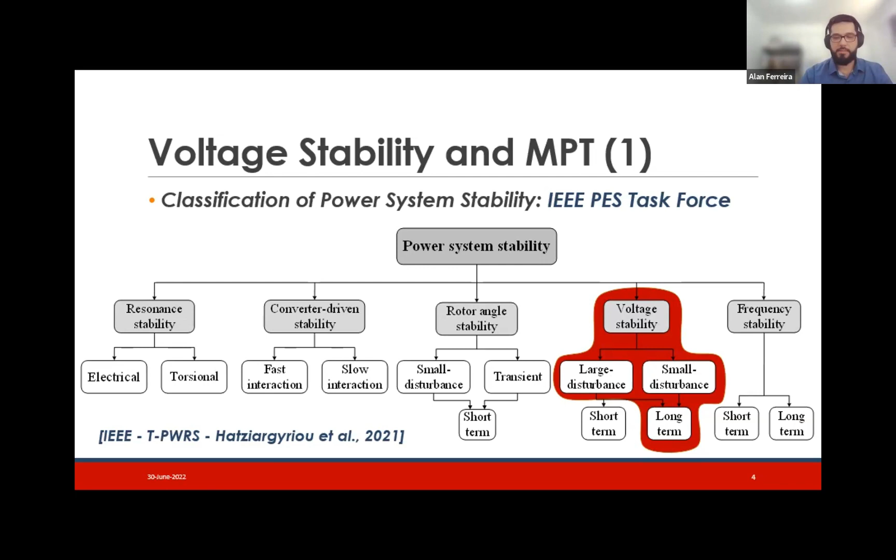To start, it's important to remind the relationship between voltage stability and maximum power transfer, because this concept will be very important when we think about monitoring voltage stability in power systems. We're going to be interested in assessing voltage stability in a long-term perspective, regardless if the disturbance is large or small. The analysis presented here may also be applicable for short-term voltage stability, but it was not the focus of this work.

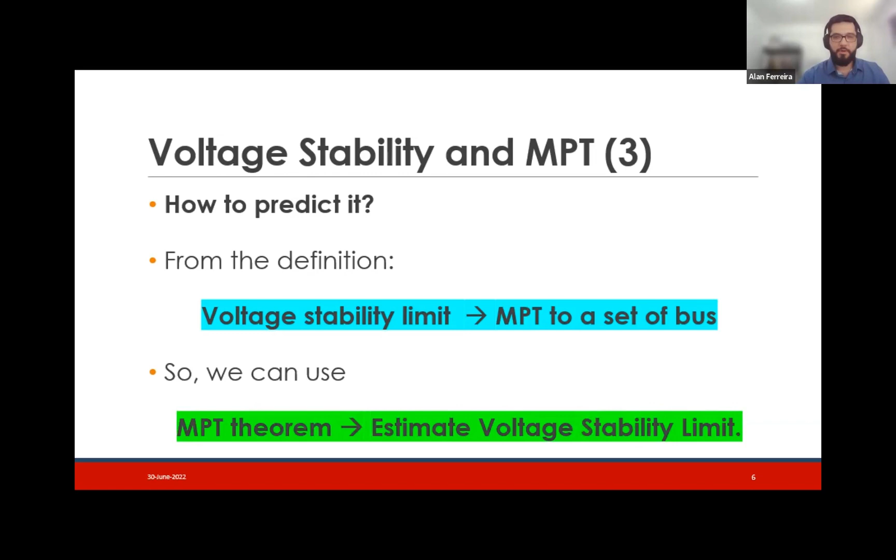Okay, but how to do that? How could it be possible to predict the voltage stability of a power system? Just from the definition you just saw, there is a high correlation between voltage stability and maximum power transfer to a set of buses in the power system. So because of that, we can use the maximum power transfer theorem to do that task and estimate the voltage stability of a power system of interest.

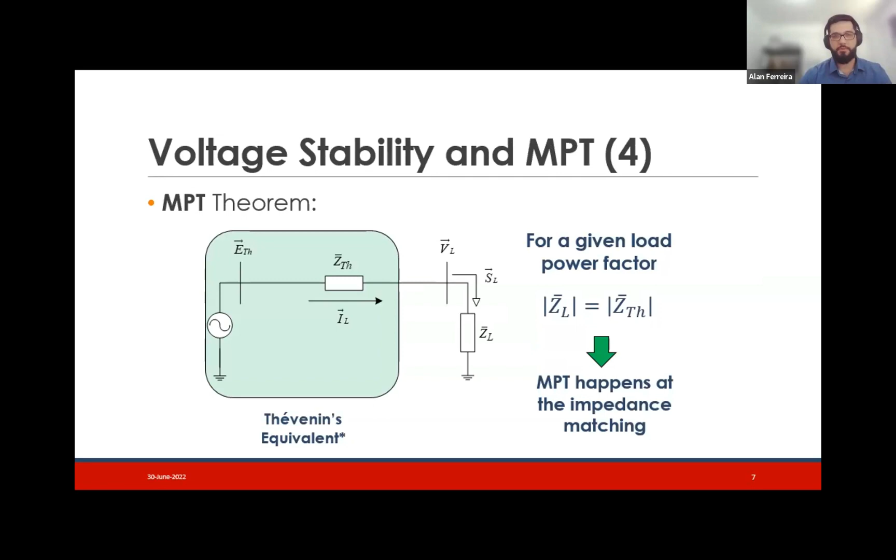Okay, and we can say that this theorem, the maximum power transfer theorem, will be the foundation for the Thevenin-based methods aiming to assess voltage stability, right? So the methods that we find in the literature share a basic operation mode, okay? First, they aim to estimate ZTH and ZL from PMU measurements, right? The idea then is to update this estimation as fast as possible in order to track any topology changes that may happen in the system, right?

And having both impedances, ZTH and ZL, through the impedance matching criteria, we can monitor the stability of a power system in terms of voltage, right? But as the impedances do not have a straight relationship with how much power we still have in the system, there are power margin indexes in the literature based on those Thevenin parameters, and using one of those strategies, we can then monitor the stability in a power system.

As well, since the monitoring of voltage stability is tightly dependent on the accuracy of the estimation method, if an approach inaccurately estimates those parameters, it may lead to wrong estimations of the voltage stability limit of a power system, right? And this can be one of the reasons some methods may not work properly. What is actually happening is that they are not properly estimating the equivalent impedance, right?

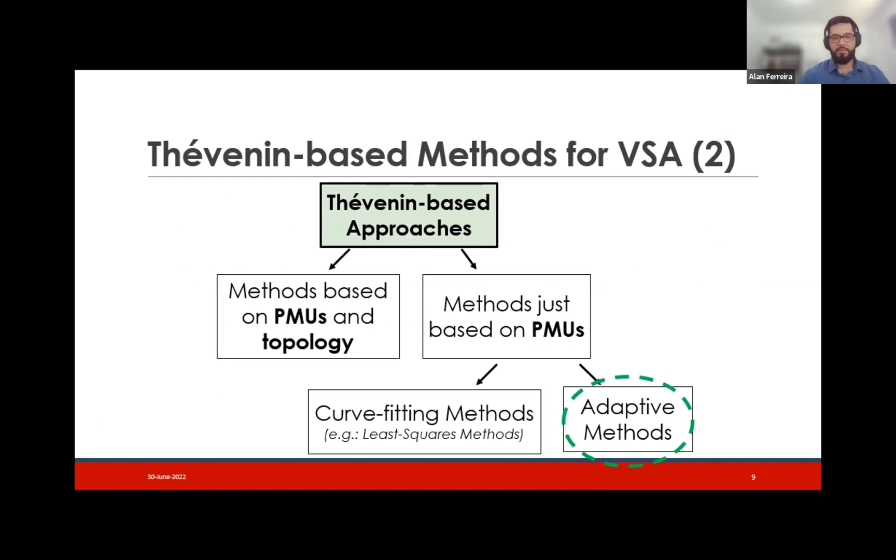Okay, so here we can organize the methods inspired by the Thevenin equivalent and PMU measurements in two big families: methods based on PMUs and topology knowledge, and methods just relying on PMUs. And to emphasize, the methods we are mainly evaluating in this work are the adaptive methods, right? Because of that, it is important to understand reasonably their operation mode, okay?

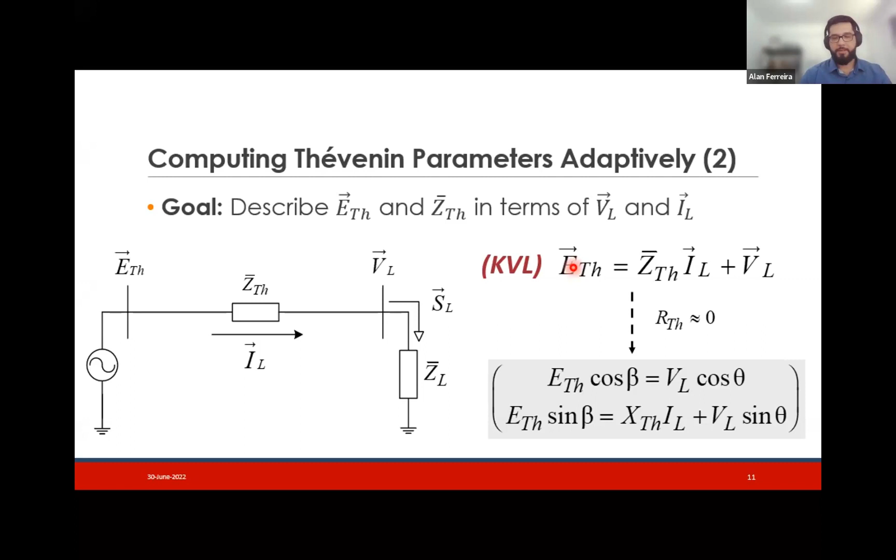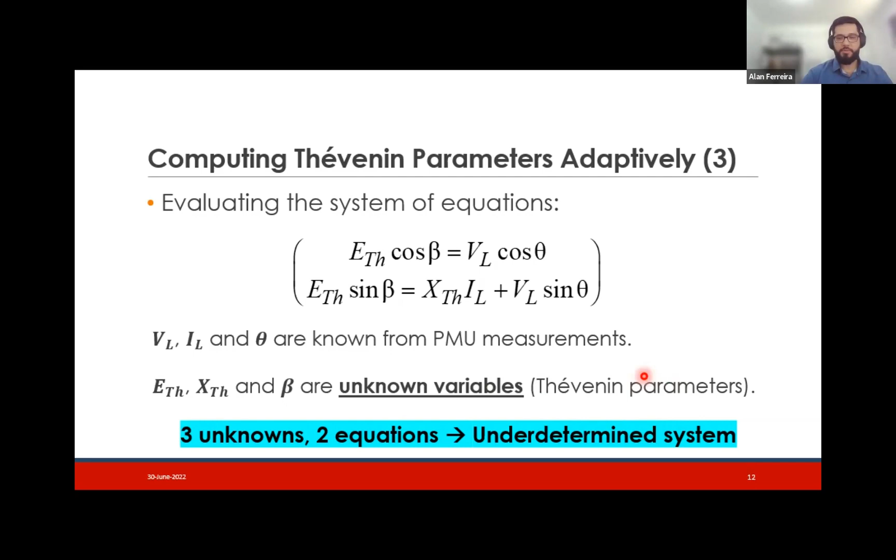In this system of equations, we have three unknowns, which basically are the Thevenin parameters that we want to estimate, and only two equations. Thus, we have an underdetermined system. But this problem became a solution, because from this issue the adaptive approaches arise. If we set one of the unknown variables, for example XTH, which we call the free variable, we are able to compute the other ones.

So to solve this system of equations, if we set XTH as the free variable, we can compute beta and ETH. Alternatively, we can also set ETH as the free variable, and then we have what we call the adaptive ETH approach. In this case, the quantities to be computed are beta and XTH.

And the issue is this: the free variable is the specified quantity. If it is possible to specify this free variable as the actual value, the other parameters are also going to be known.

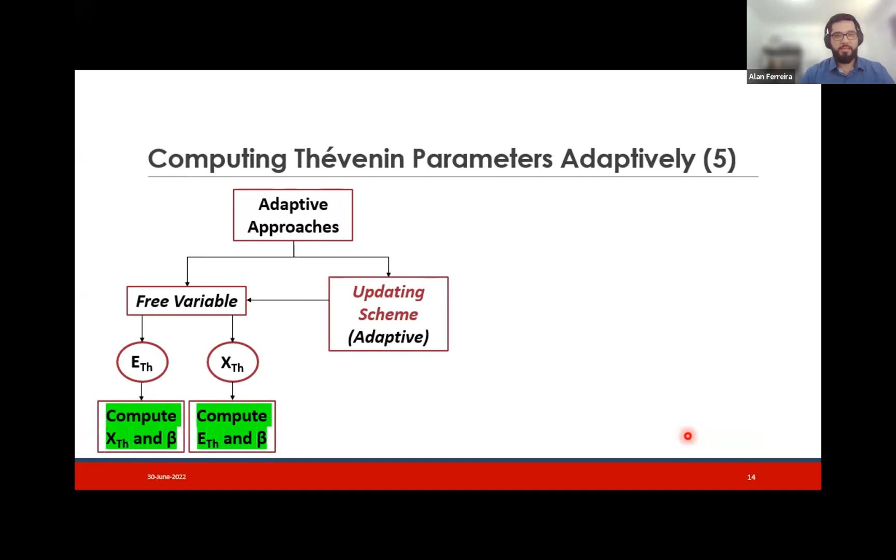From this, we can organize the adaptive approaches this way. First, we set one of the quantities, ETH or XTH, to be the free variable. But just setting this variable does not solve the problem, because we still do not know the actual value of the free variable. So the idea is to have an adaptive updating scheme to bring the free variable's initial guess towards its actual value, because in this way the other quantities will converge as well.

In our case, because we are using PMU measurements to drive the updates of the free variable, we give the adaptive concept to this approach. So when we talk about the adaptive approach, this concept is related to the use of PMU measurements to update the free variable for every time window of PMU measurements.

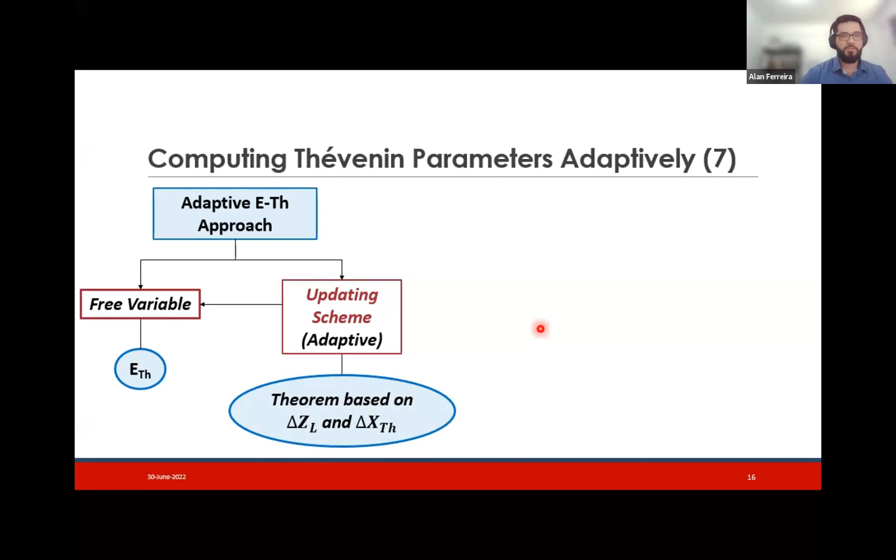The first time Thevenin parameters were estimated this way was in 2008 by Corsi and Taranto. On that occasion, the authors developed the adaptive ETH approach, setting ETH as the free variable and then computing beta and XTH. To drive the updating process, the authors developed a theorem based on the comparison of delta ZL and delta XTH for each two consecutive PMU measurements.

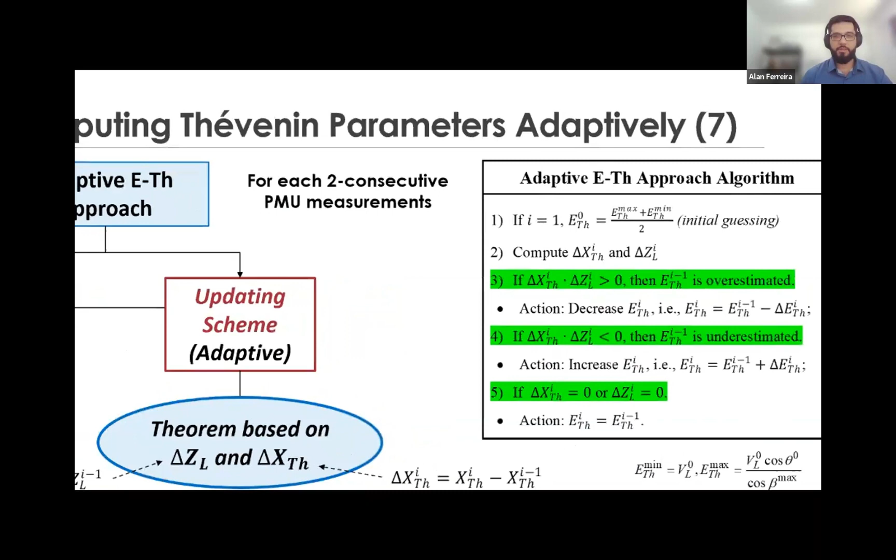So basically, for each two consecutive PMU measurements, they compute delta ZL, the variation of the load impedance, and delta XTH, the variation of the estimated Thevenin reactance. Based on those two quantities, they set their algorithm. Just to comment here, what is the rationale of this method?

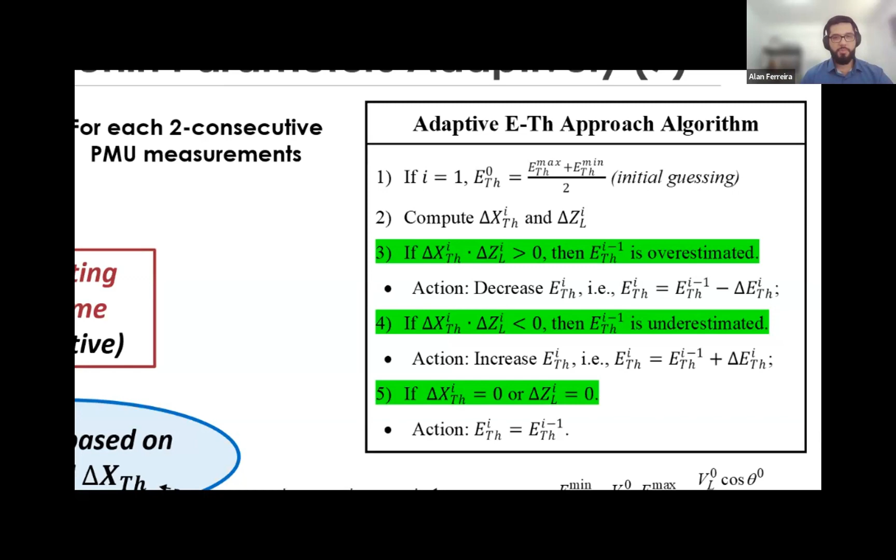Basically, if delta XTH and delta ZL vary in the same direction, it means the estimated ETH for that time window is overestimated, so the action to be taken is to decrease the estimated value. Conversely, if delta XTH and delta ZL vary in different directions, it means ETH is underestimated, and the action to be taken is to increase the estimated value.

However, if one of the variations is equal to 0, the method should not update. It is important to bring the physical meaning of these variations being equal to 0, because we're going to use one of them to develop the extended approach further. When delta ZL is equal to 0, it means the load of the system did not vary in that time window, so in this case we should not update.

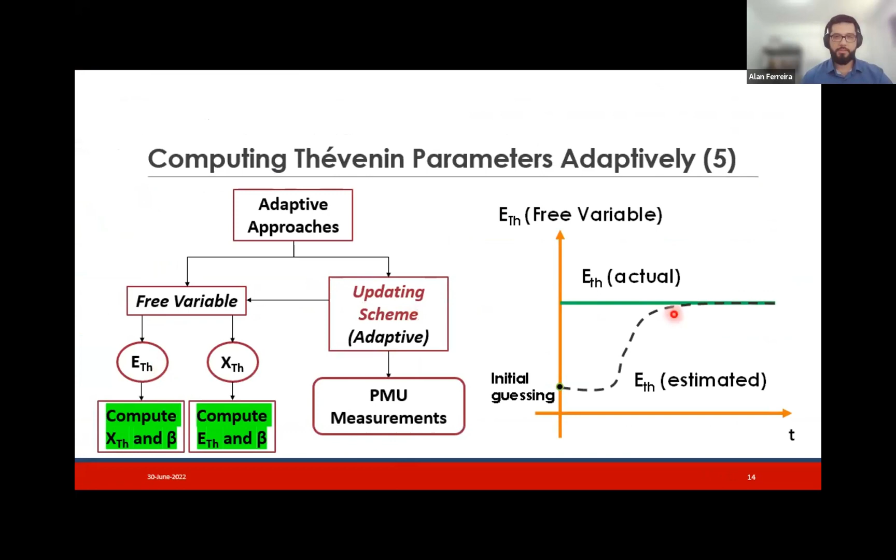So it's important to keep in mind those ideas. However, after a deep evaluation of the original ETH adaptive approach, we found out that the method in some cases may diverge the estimation. One of the problematic situations is when the power factor changes between the two considered measurements.

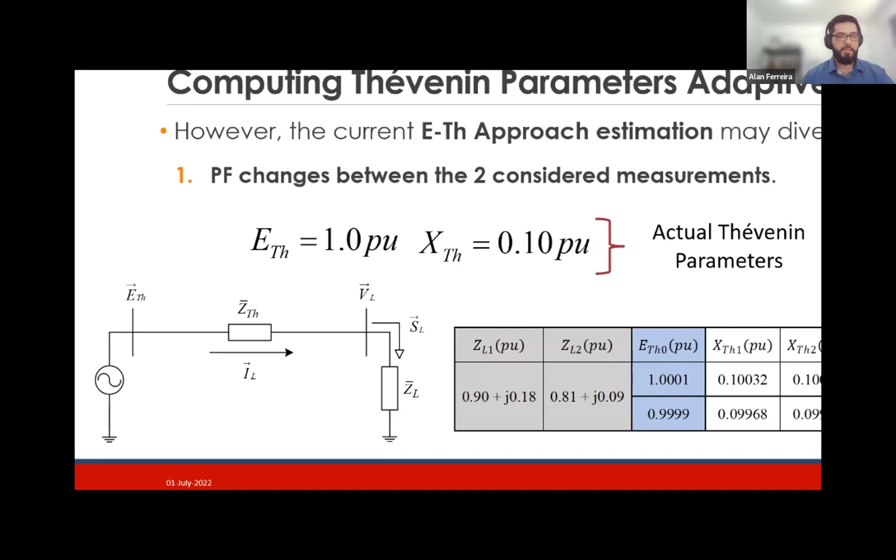So just to show an example of this, we have here this system, a load bus, and for this case, the actual Thevenin parameters are ETH 1 per unit, XTH 0.1 per unit. And what we're gonna do here is to subject this load to a variation. So here we have ZL1 and ZL2, which are the load impedances for two consecutive measurements.

And here we have analyzed two cases. The actual ETH is equal to 1 per unit, but here I'm guessing a value a little bit higher, that is, an overestimated value. When we compute delta XTH and delta ZL, the method should properly update. But what we see here is that we have overestimated ETH, and according to the algorithm, if delta XTH and delta ZL have variations in different directions, it should mean that the estimation is underestimated and not overestimated.

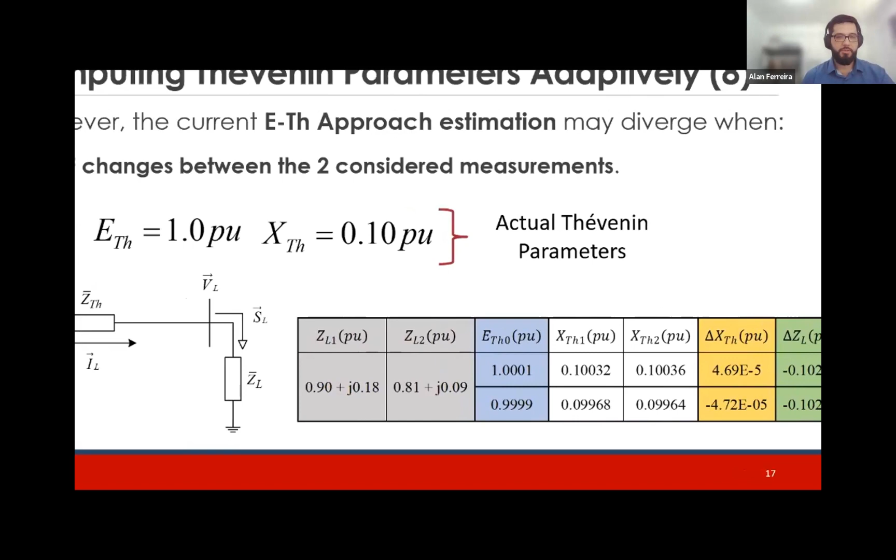So in this case, we are doing this variation with variation of power factor. And in those cases, we see that wrong updates are given to our estimated value. And if you have many time windows with wrong direction updates, the estimated Thevenin voltage would diverge, right? A similar case happened when we set an underestimated value here. The comparison of delta XTH and delta ZL did not provide correct updates.

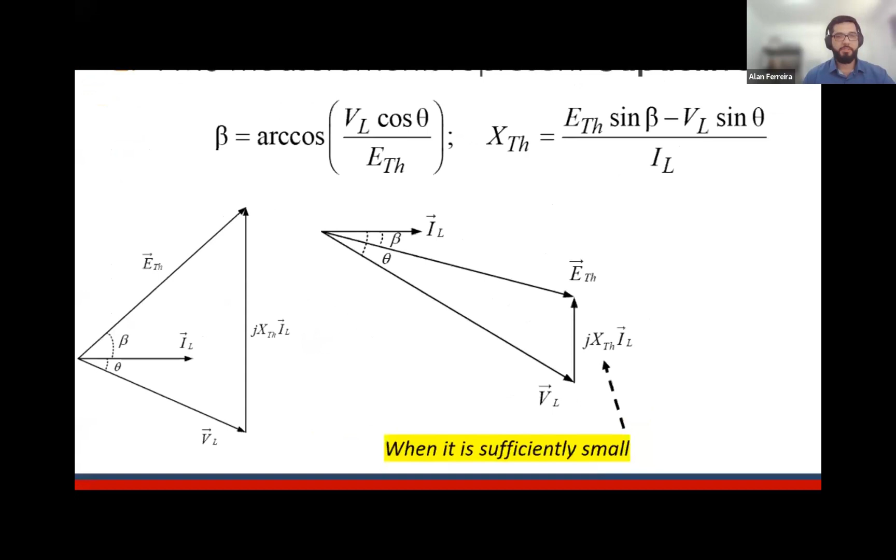The second case where the current approach fails is when we have capacitive loads, because we have checked that in some loading scenarios, ETH may lag the current phasor IL. So it means that beta should be negative. But the formulation that computes beta is an even function, right? So it's not possible to compute negative betas when the actual beta is negative.

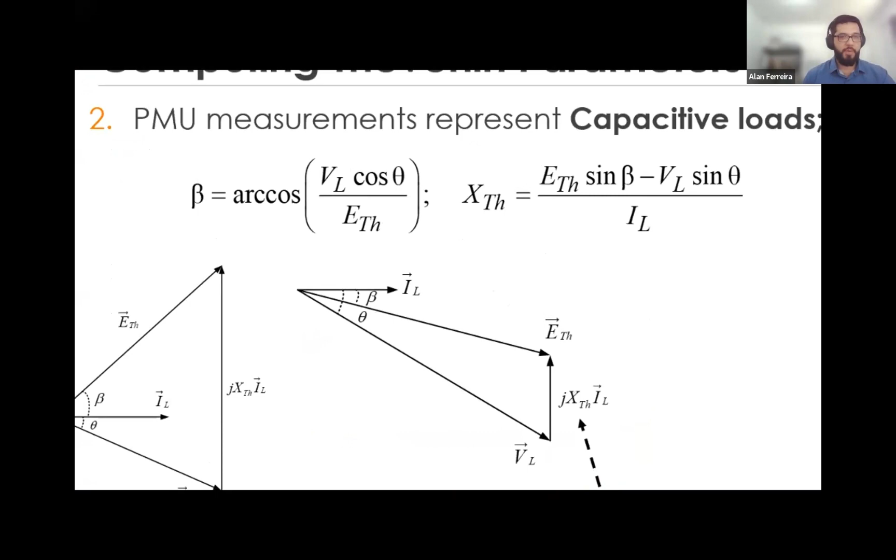And again, if you use the wrong beta to compute XTH, comparing delta XTH with delta ZL will give wrong updates, and it can make the method estimation diverge as well. So in order to bridge those gaps, some improved approaches were developed. And here we are going into the explanation of the extended adaptive approach. The first one we are calling here the extended adaptive method.

In this approach, we set again ETH as a free variable, but now what drives the updates of the free variable is the minimization of delta XTH criteria. So in this case, we only use delta XTH to define if we're going to increase or decrease for each time window evaluated. Here we have a brief example. This is the case where the original approach had failed, the overestimated case, using the new concept.

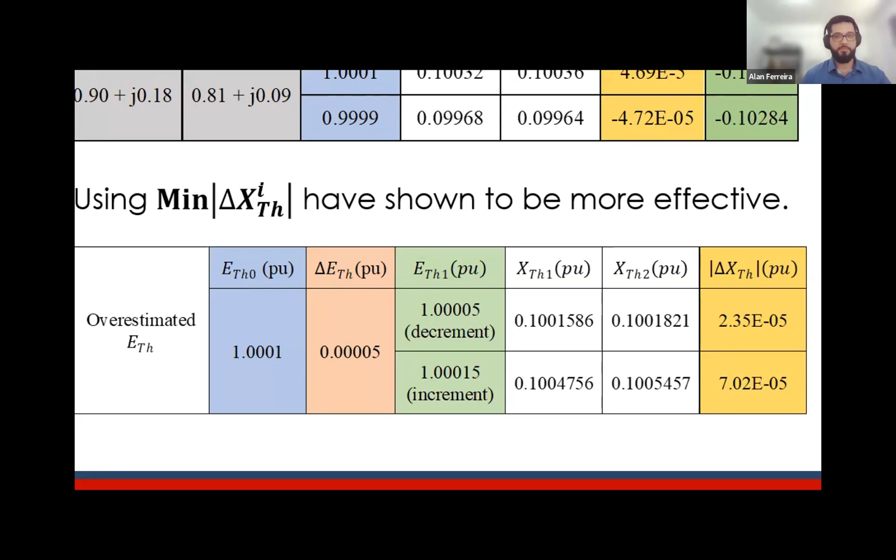If we do that for the further time windows, we're going to have the convergence of the method in a much more effective way. So this is what we are calling the minimization of delta XTH. For each two consecutive PMU measurements, we do this evaluation and update the free variable accordingly.

The second issue that we had in the original approach was regarding the negative value of beta. Because the cosine is an even function, it's not possible to compute negative values when beta is actually negative. So to solve that, we had to develop an algorithm to, in real time, for each two consecutive PMU measurements as well, distinguish when beta is negative or positive.

And the idea behind our method, our algorithm to estimate the sign of beta, is this. We can think here again of the load bus connected to its Thevenin equivalent. And if we see from the perspective of the equivalent voltage source, ETH, we can define this total impedance here. So our total resistance is going to be only the resistance of the load, but regarding the total reactance, we're going to have the contribution of the Thevenin reactance plus the reactance from the load, right?

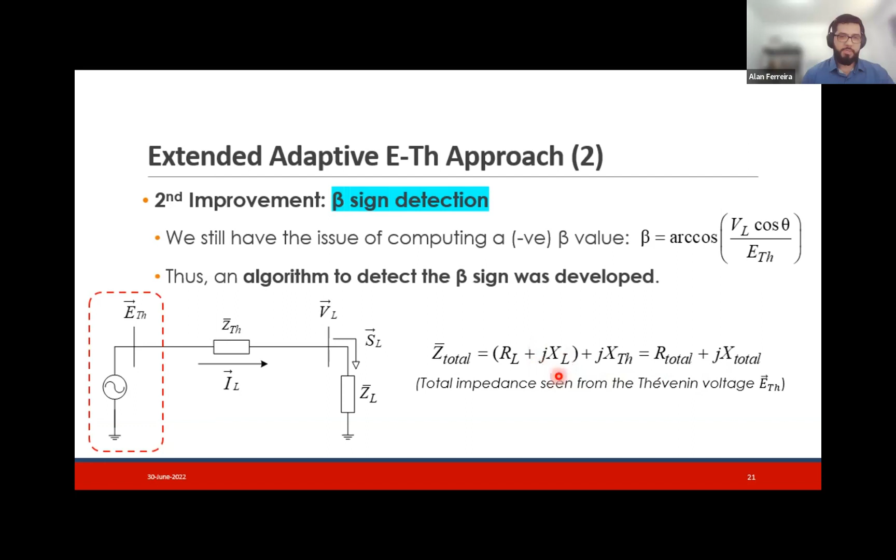And the idea behind this concept is that when X total is larger than 0, that is positive, it means that we're going to have an equivalent inductive circuit, and an equivalent inductive circuit means that ETH leads the current IL. So basically we're going to see this in 2 situations. When the load is inductive, XL is always positive, and we're going to have this phasor diagram here, and we always have beta positive for inductive loads.

But when we have capacitive loads, it will depend on the situation. Basically, if the absolute value of XL is smaller than XTH, this is going to happen, and we're going to have positive beta. And on which occasions are we going to have negative betas? When we have a capacitive load and the absolute value of XL is larger than the absolute value of XTH, so this sum gives us a negative value.

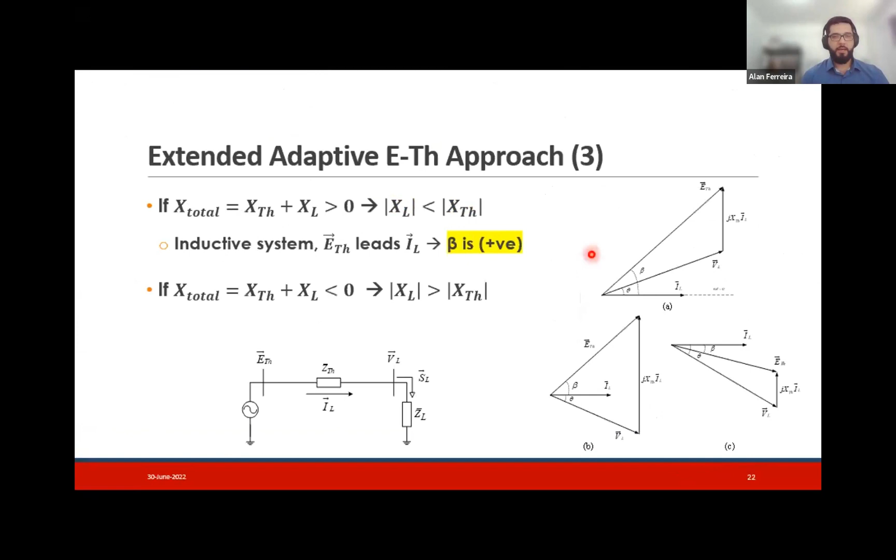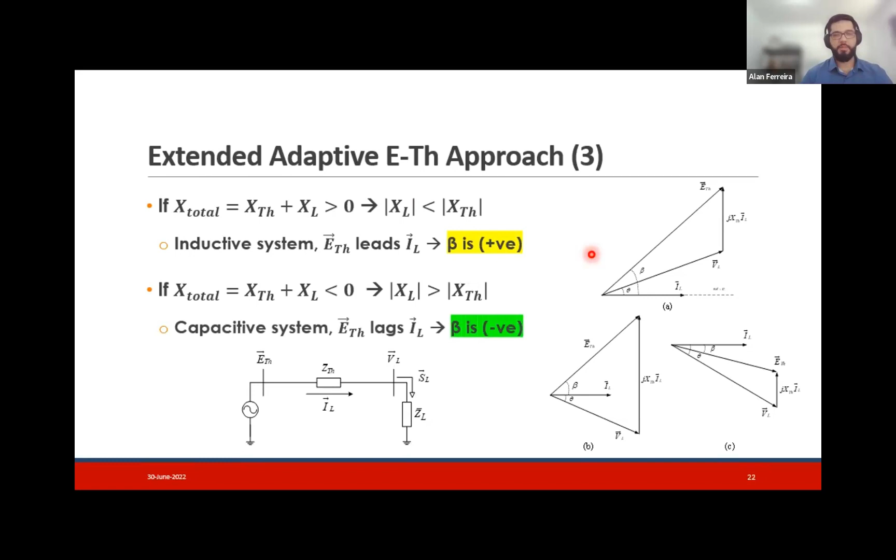So it means that the equivalent voltage is seeing an equivalent capacitive load. So we are in the situation in this phasor diagram where ETH lags the current. Because of time, I won't go deep into that, but that was the basis to describe an algorithm to detect the sign of beta for each 2 measurements.

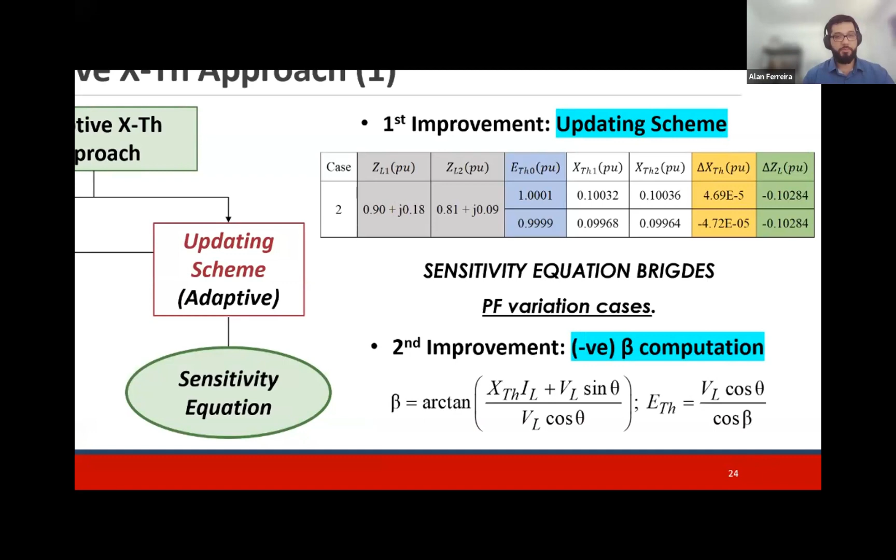The second approach we are calling the adaptive XTH approach, and now the free variable chosen is the Thevenin reactance XTH. To drive the updates for the free variable, we use some derived sensitivity equations. Using this new scheme, we are able to improve the power factor variation cases that we had issues with in the original approach. Another issue was the computation of negative beta; because XTH is the free variable, beta is computed using the arctangent function, which has no problems computing negative values. So this strategy is also able to solve all the problems we had in the original approach.

Just to comment a little on how we derived the sensitivity equation. We start again from the underdetermined system we had previously, 3 unknowns, 2 equations. If we replace XTH in this equation in terms of the sensitivity parameter delta XTH and solve this new equation for delta XTH, we obtain what we call the XTH sensitivity equation, where there are some key quantities to pay attention to. The idea is that delta XTH is the estimated error of the estimated Thevenin reactance. We have here delta ETH.

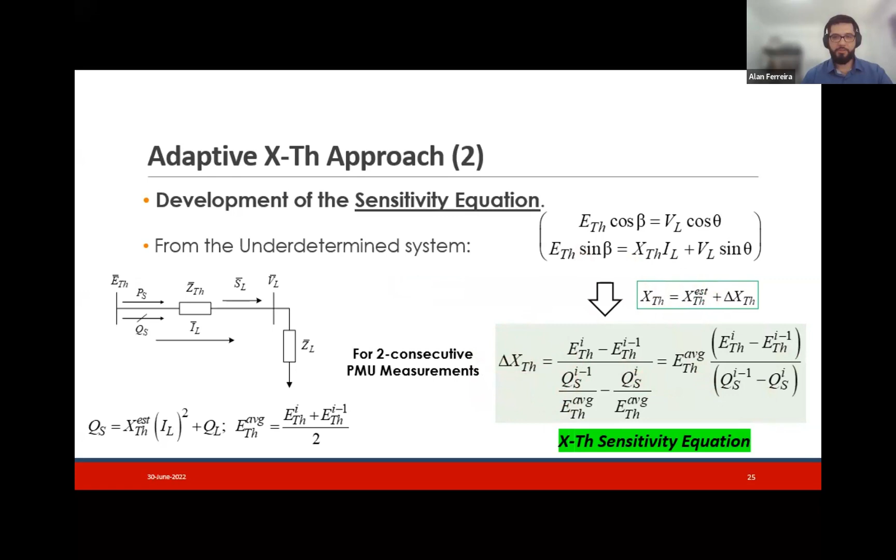Okay, just a second. We have here delta ETH, which is the variation of the estimated ETH, and we have here delta QS, which is the variation of the reactive power from the source, the equivalent voltage source, right? What is important to pay attention to in this equation is what is able to switch the sign of the increment, that is, to have a positive or negative increment. And when we look at this sensitivity equation, we see that the quantities able to do that are the variations of estimated ETH and variations of reactive power from the voltage source.

Okay, in this way we can use those 2 quantities to drive the updates of the estimated Thevenin reactance for each 2 consecutive measurements as well. So we have derived the sensitivity equations, but from that we're just going to use delta ETH and delta QS and have a similar theorem to the one used in the original approach, but instead of comparing delta XTH with delta ZL, we are comparing delta ETH and delta QS, okay?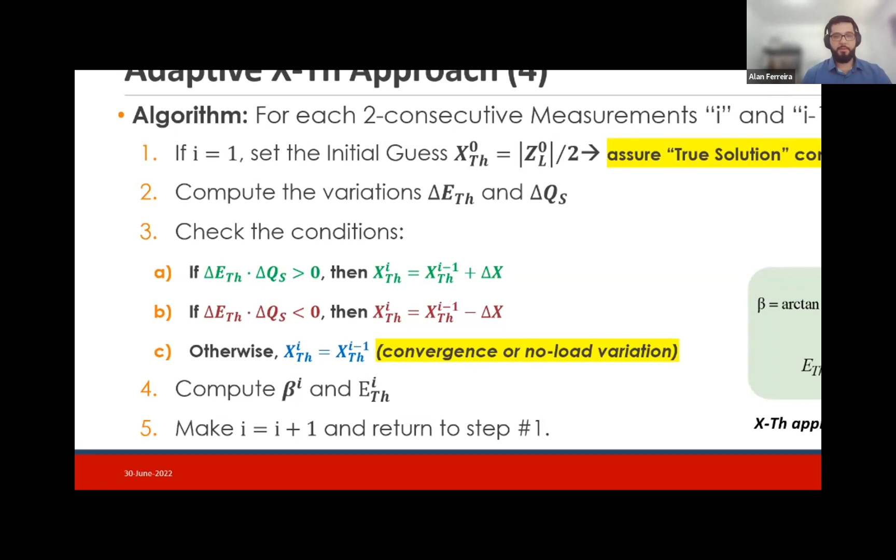So basically, we see that if we have delta ETH and delta QS varying in the same direction, it means we need to increase the estimated XTH. However, if we have delta ETH and delta QS in different directions, we need to decrease. So the sensitivity equation is used to define the direction of increment. And if XTH computed in 2 consecutive measurements is equal, it means that convergence was reached.

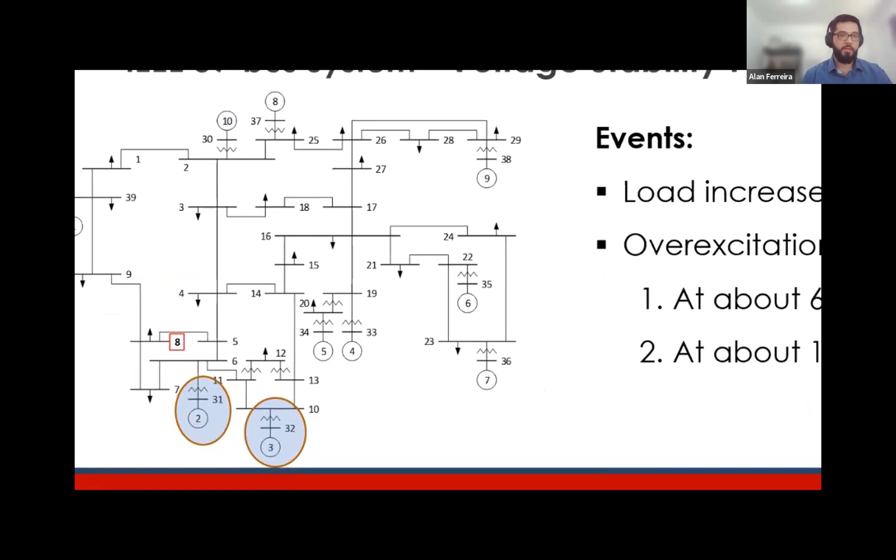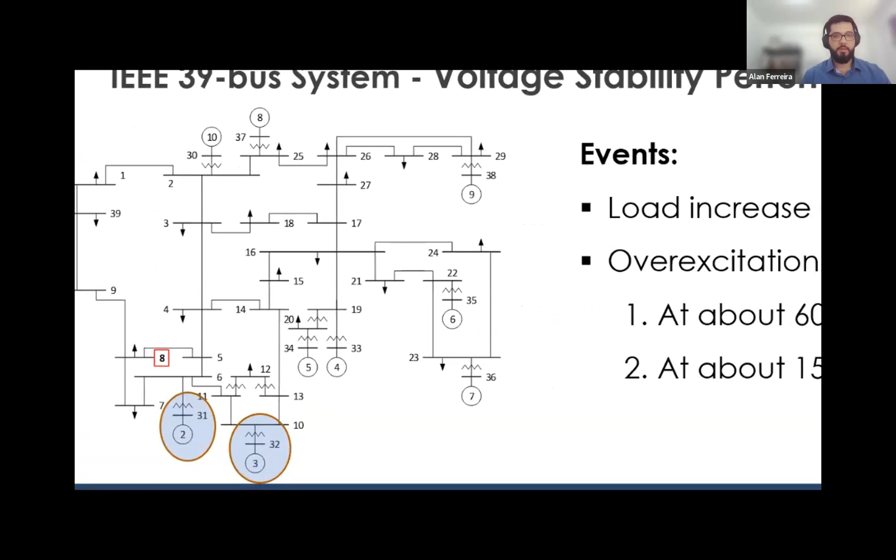Okay, so to show a case example where those methods were tested, we have here the IEEE 39 bus system, and the idea is to check the voltage stability performance of those methods. And basically, what happens in this system? We have the load at bus 8 here, which is increased until maximum power transfer is reached. And what happens in the interim is that some overexcitation limiters from generators 2 and 3 are going to act. And this situation changes a little bit the dynamic of the estimation of the system.

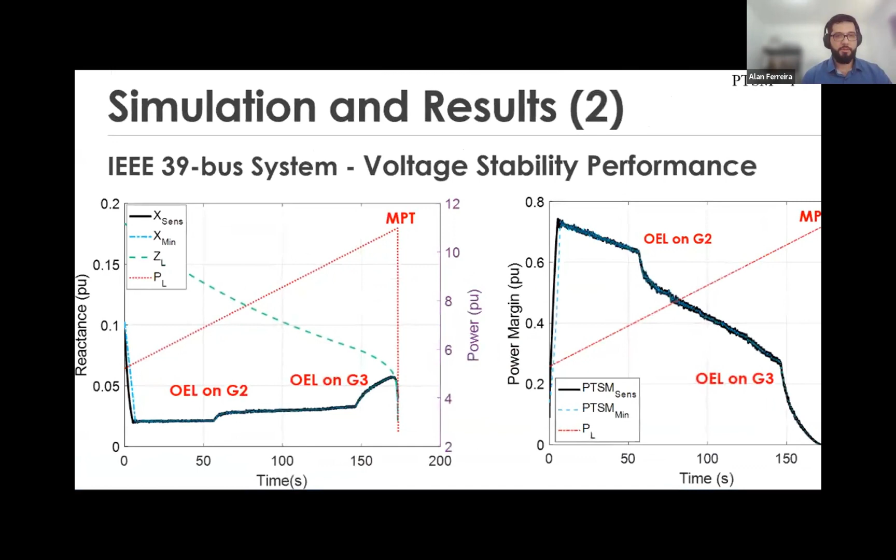And from that disturbance case, we have here the estimations obtained. So first, in the left picture, we have the plot of the estimated Thevenin reactance from both methods: using the sensitivity equations in black, using the minimization process in blue, and in green here we have the load impedance, right?

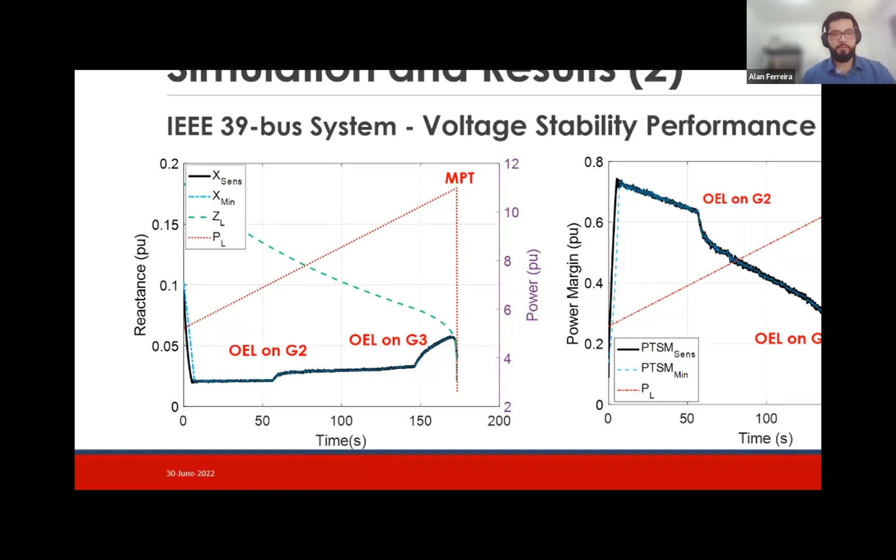And we can see that our methods have properly updated their values when the overexcitation limiters of the generators act. So here, at about 60 seconds, generator 2 activates its overexcitation limiter, and the estimated reactance properly increased. And again, when generator 3 activates its overexcitation limiter, we can see that the methods were able to adapt accordingly and properly to the disturbance happening in the system.

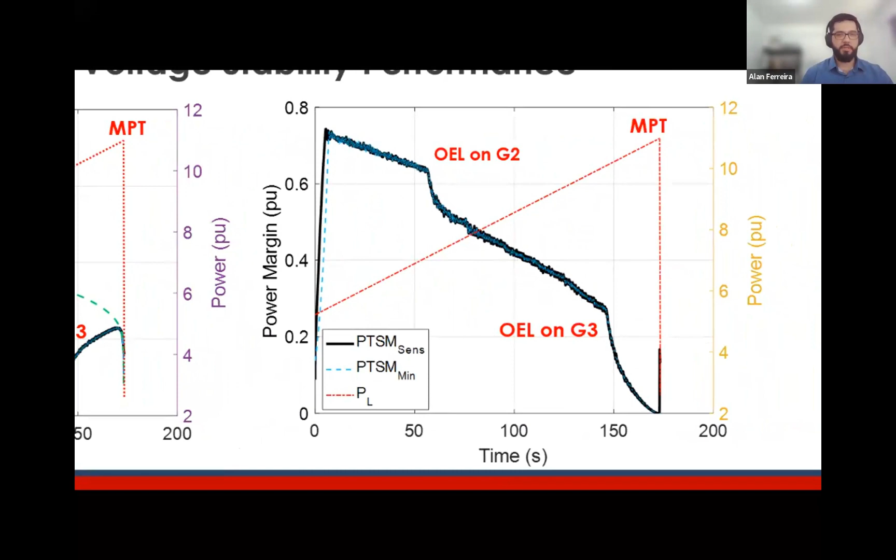And we can see here that maximum power transfer happens very close to the moment of impedance matching between ZL and the estimated value. You can see that as well if we plot the power margin indexes. Here we have at the beginning a very large power margin. But as the system starts to be disturbed with load increasing and action of overexcitation limiters, the natural tendency is that the margin decreases. And what we can see here is that the methods can correctly track that.

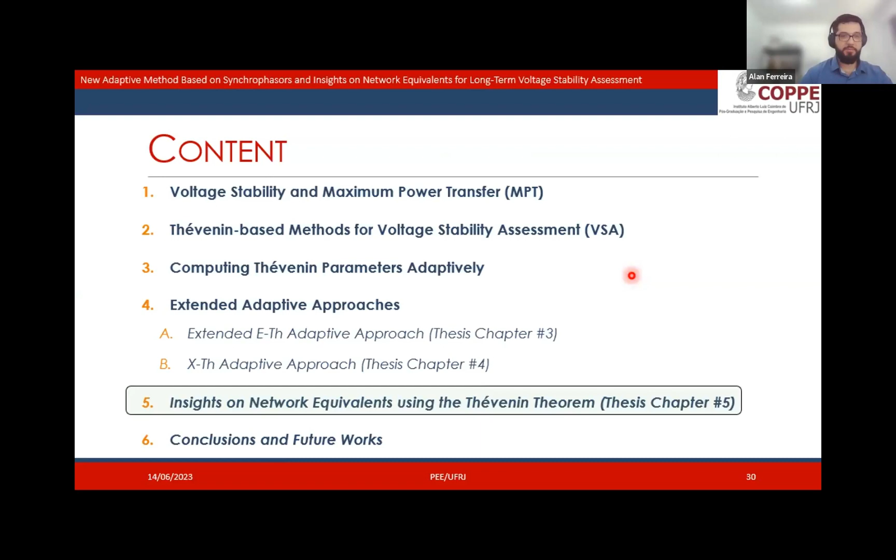Okay, having analyzed the extended adaptive approaches, we're going to get into the discussion about network equivalents using the Thevenin theorem, right? And basically the issue is this. In the literature, one can find some papers stating that Thevenin-based approaches cannot be employed for voltage stability assessment in power systems, because, correctly, the Thevenin theorem relies on system linearity. And usually their major claim is that those approaches are not able to correctly represent the nonlinearities caused by parallel loads in the system. Okay.

They usually use this term parallel loads to say that there are loads in other buses in the system. But what we see, however, is that those methods based on Thevenin equivalent were tested in many system conditions and have shown very accurate performance in detecting voltage instability in power systems. So the idea of this work is to investigate a little bit what is happening.

But before we go ahead in this sense, it is important to clarify some concepts that we're going to be talking about. For example, when we talk about computing the Thevenin equivalent from a specific load bus in the system, we expect to have an equivalent structure like this that usually we call a single port circuit, right? So this is what we expect when we talk about Thevenin equivalent.

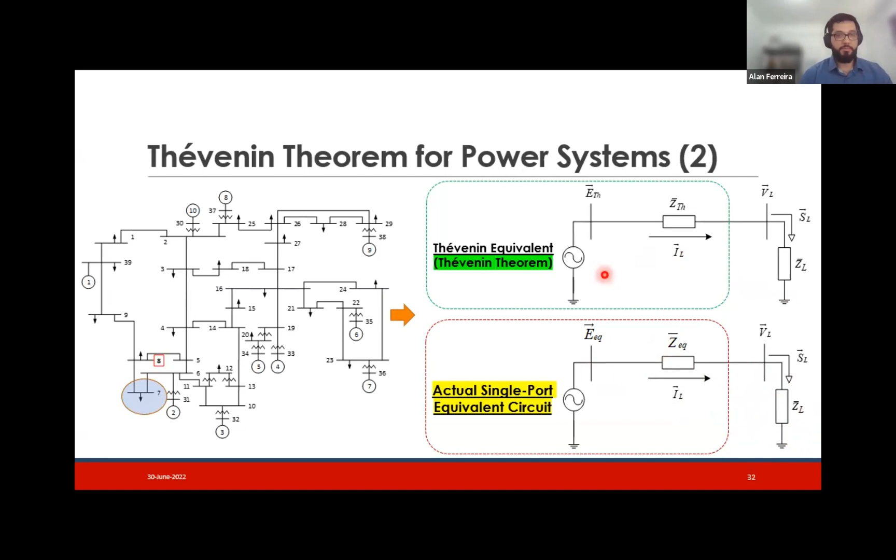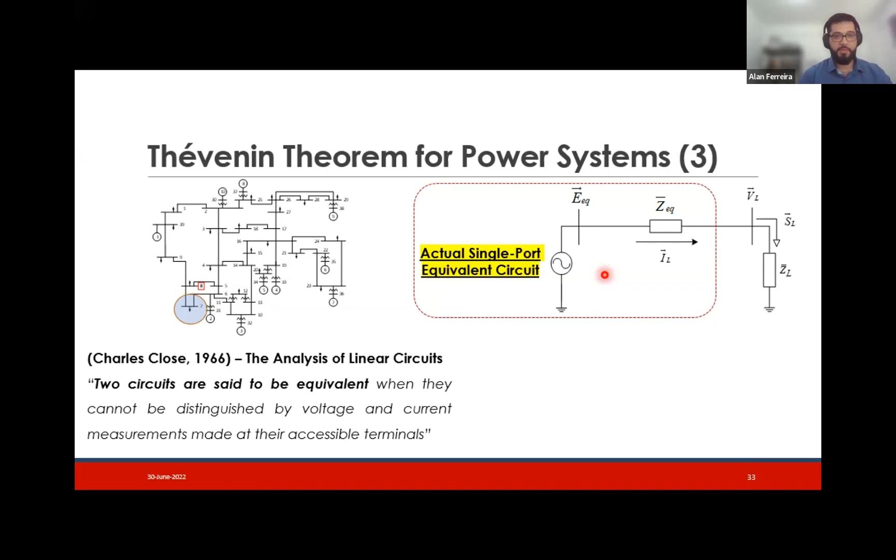But what should be the actual single port circuit? We can go to the book The Analysis of Linear Circuits by Charles Close, which says that two circuits are said to be equivalent when they cannot be distinguished by voltage and current measurements made at the accessible terminals. So regardless of whether this load is connected to a single port equivalent or to the original system, two circuits are equivalent if they provide the same or very similar voltage and current measurements at the accessible terminals when the load is varying.

A consequence from this point of view is that real and reactive power responses should be equal as well, or at least similar, at the accessible terminals for both systems, equivalent or original. So when we think about the actual single port equivalent circuit, we can think about this idea that I have shared here.

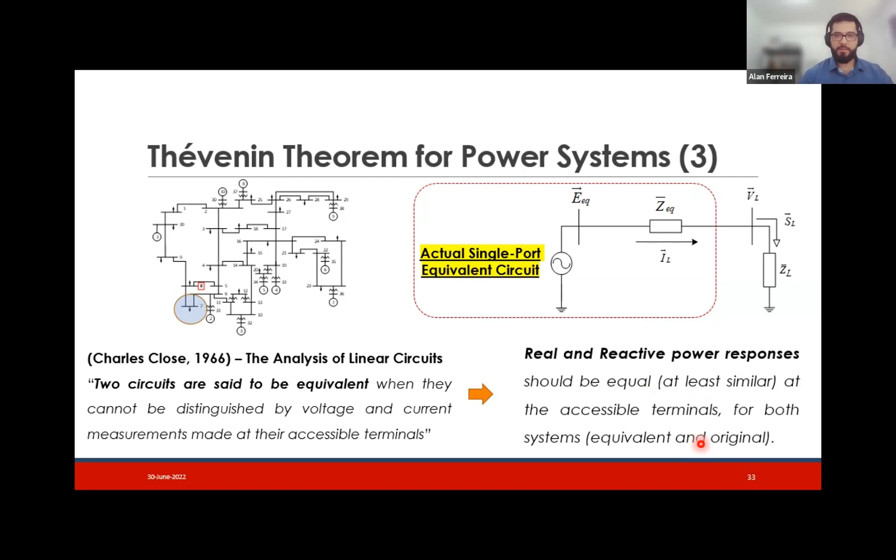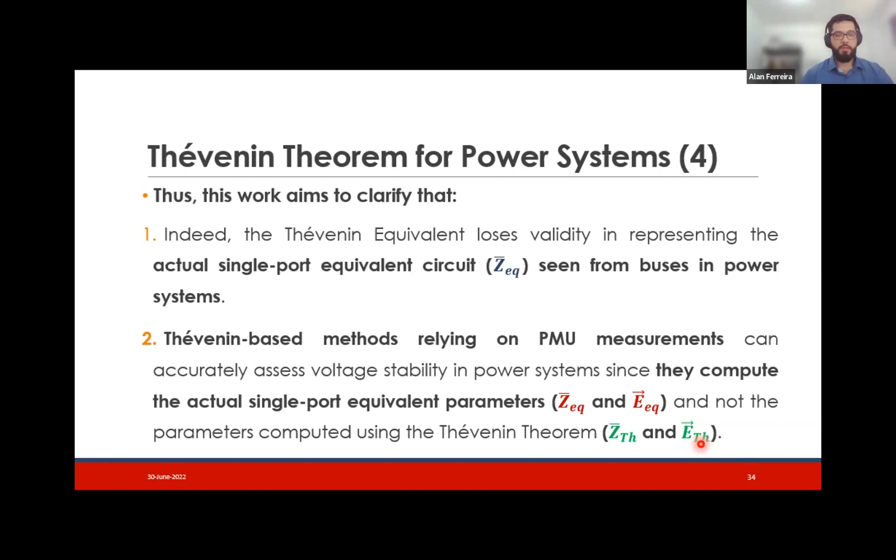Thus the objective of this work is to clarify that indeed the Thevenin equivalent loses validity in representing the actual single port equivalent circuit, Z eq, seen from buses in power systems, basically because of power system nonlinearities. Second, we show that Thevenin-based methods relying on PMU measurements can accurately assess voltage stability in power systems, since they are able to compute the actual single port equivalent parameters and not the parameters obtained using the Thevenin theorem. To clarify those points and demonstrate them, the following system is considered.

Here we have this system that I'm calling the generator to load system, which is one of the systems used in one of the papers going against Thevenin-based methods. We have two loads connected here and two transmission lines, Z1 and Z2, and it is an interesting system because there is no problem computing the equivalent by Thevenin theorem from bus number 1. Basically, the impedance Z2 is in series with the equivalent impedance of Z1 in parallel with ZL2. So according to the Thevenin theorem, that should be the equivalent impedance from bus number 1.

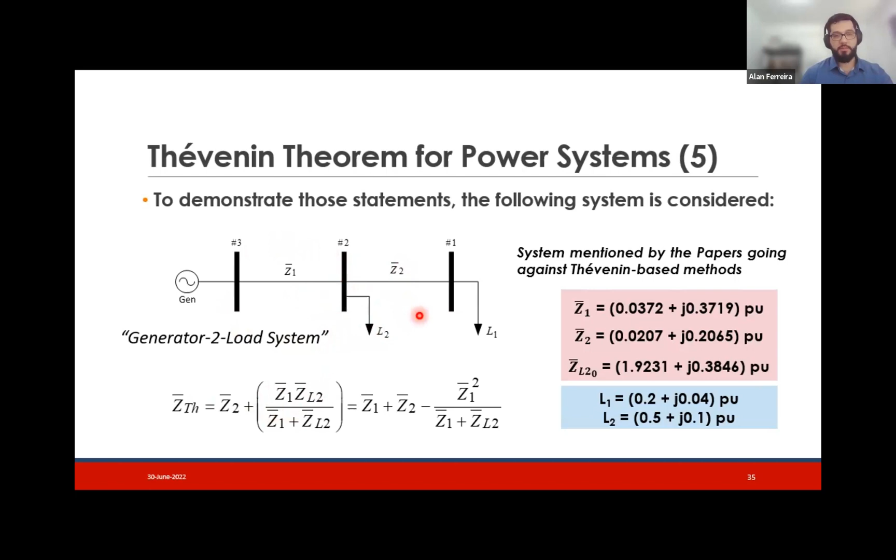What we have done is think about many possibilities of load variations in this system. In the first one, which we are calling case number 1, we consider that both loads are linear, that is, Z constant type, impedance constant type. We have chosen to increase only the demand of load L1, keeping the demand of load L2 fixed.

What we obtain here is that with the impedance matching criteria on the left, we see that the impedance matching happens directly at the time of maximum power transfer, actual maximum power transfer, because here the green curve is regarding the power in the system.

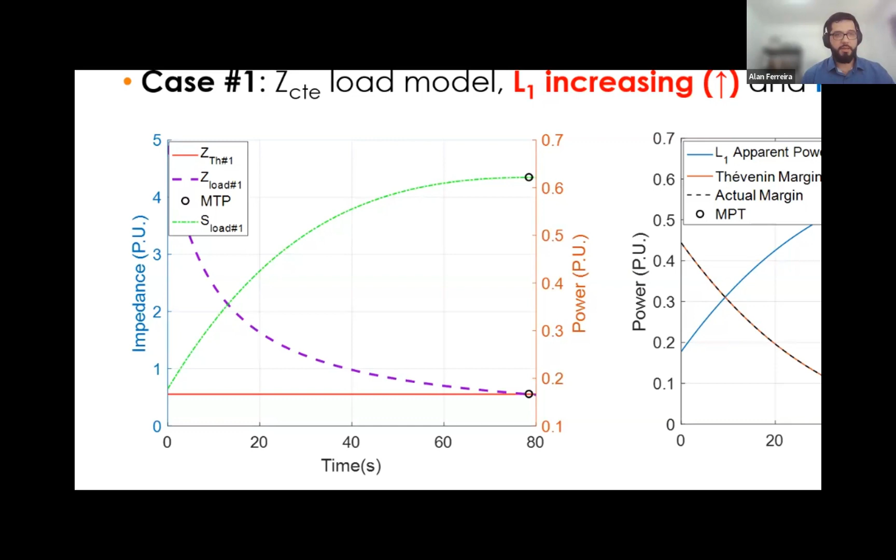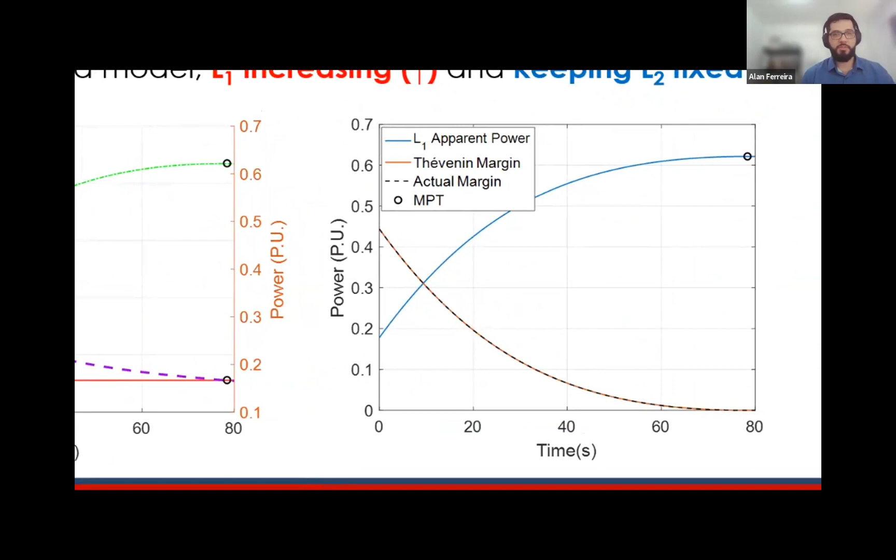Okay, and if we compute the power margin, we're going to check the same thing. When we compare the actual margin to the Thevenin margin here, they are the same. But if we choose a different situation where we have both loads as constant current type, that is, not linear

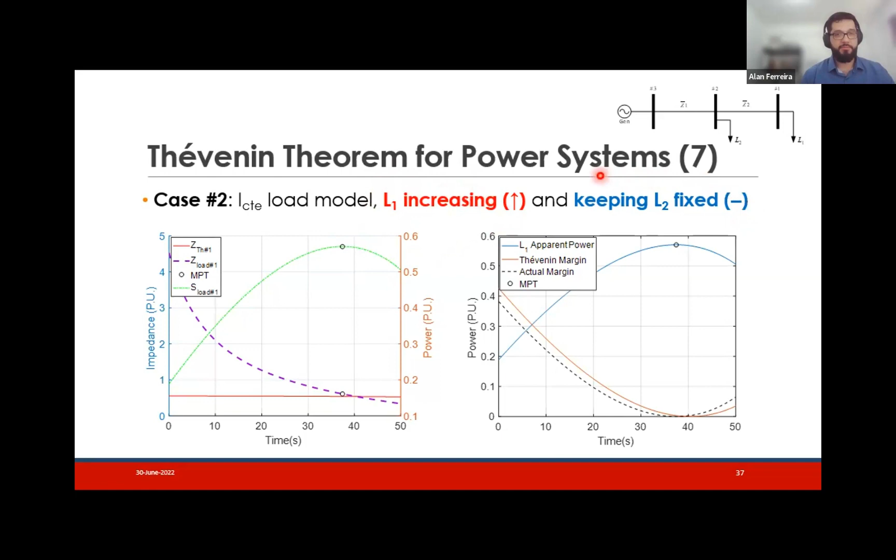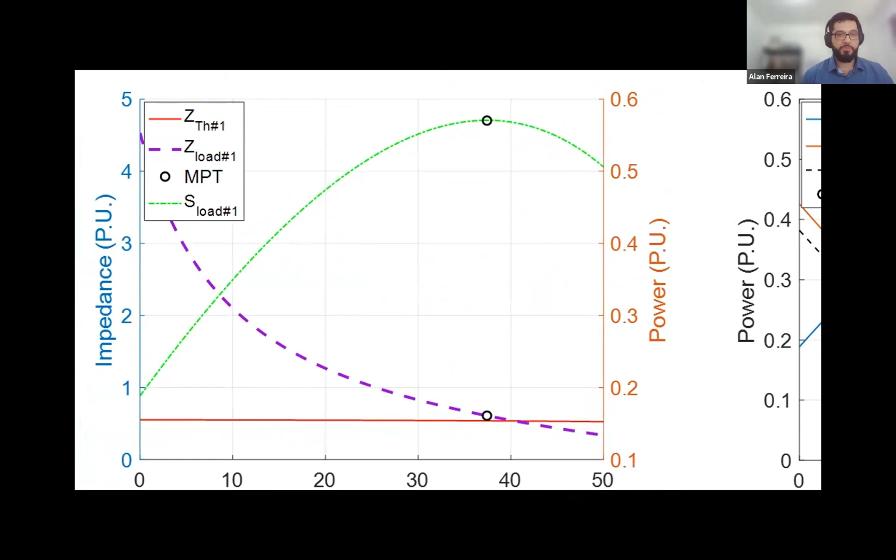loads, and we again choose to increase only the demand from load L1, keeping the demand from load L2 constant, what we have here is that now the impedance matching time is not the same time the maximum power transfer happened. So we see here a different behavior, which is also shown here when we compute the power margins. So basically, when the actual power margin runs out, the estimation would say that we still have some

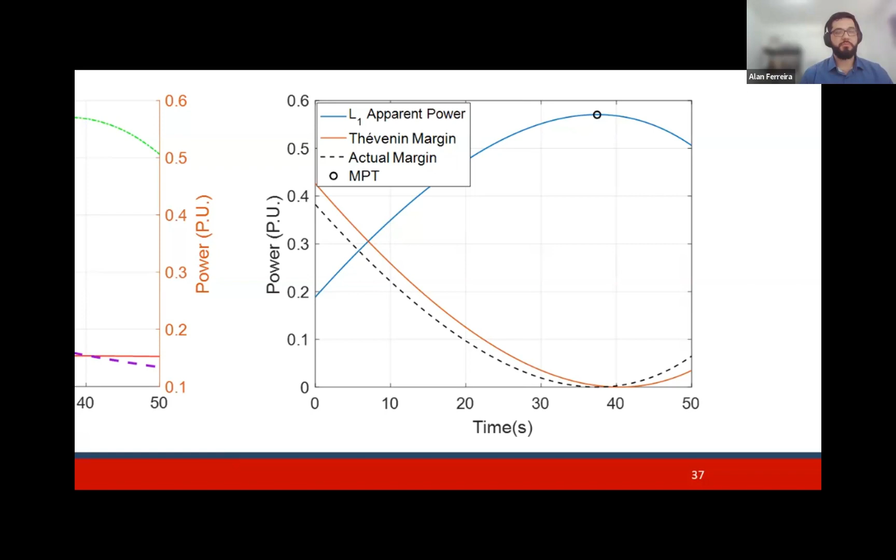power to be used. So here we have the first difference that we found, and this fact can be also computed or verified using this concept here that we are calling reactive power response factor, which basically measures the reactive power response factor from the original grid and from the equivalent grid. And the idea is that if the parameters are accurate, they should be equal or very similar.

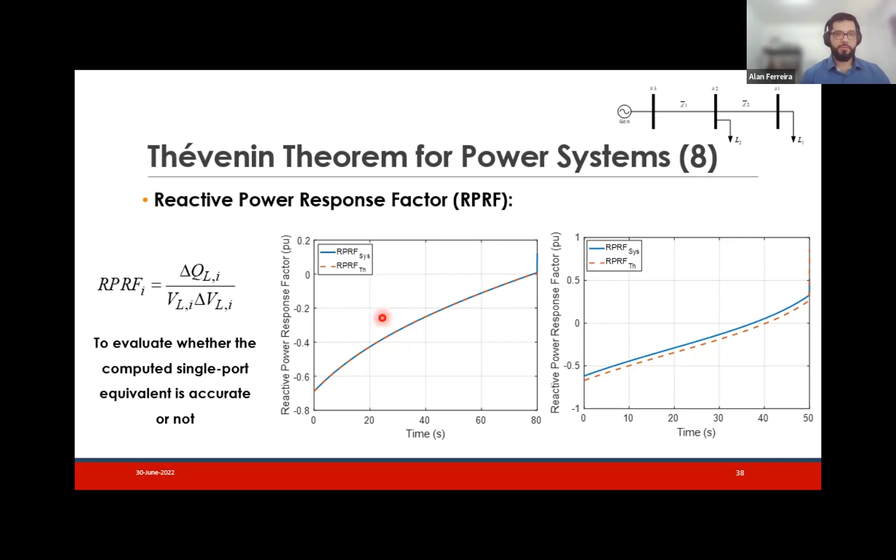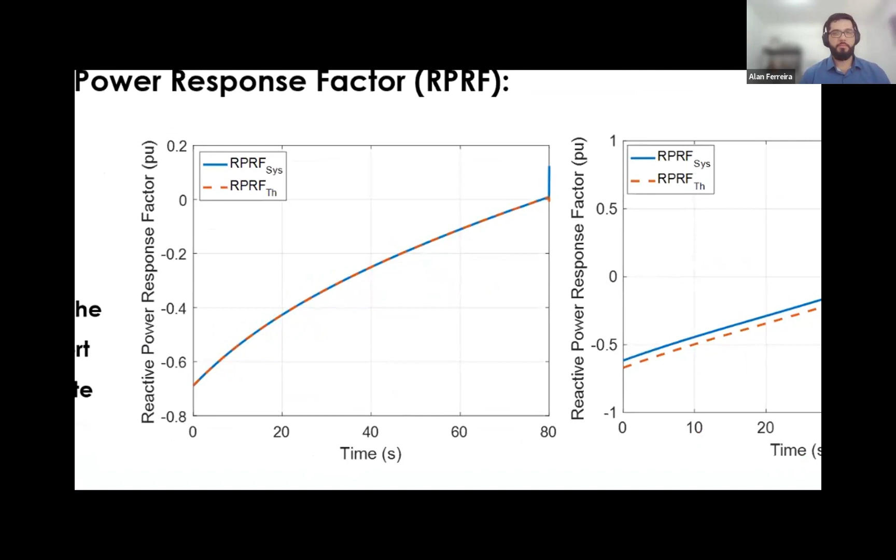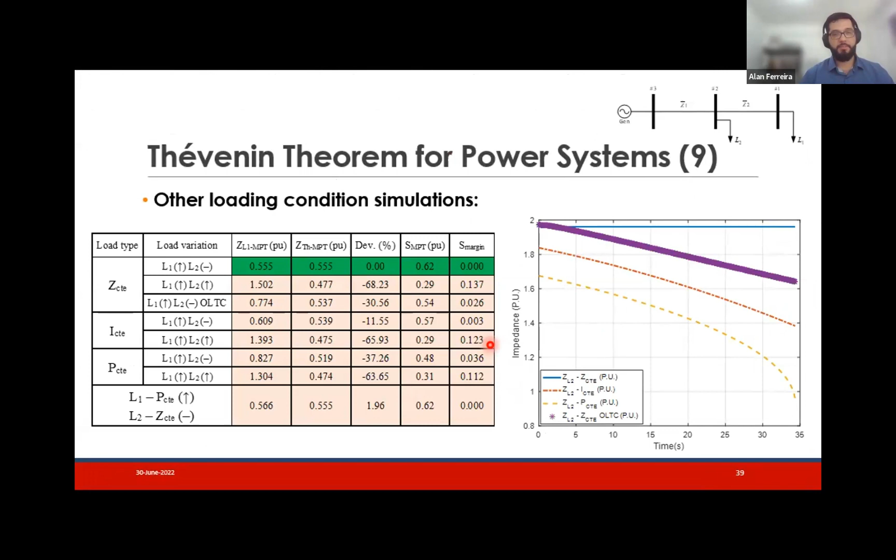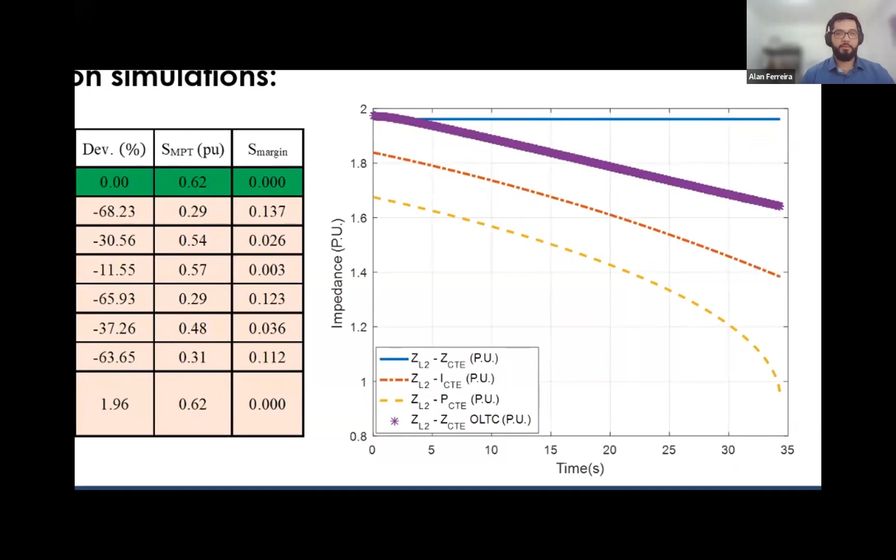So when we compute that for the linear load case, again, we have reactive power responses very similar. But when we have the non-linear loads in the system, these reactive power responses start to be different. We have tested this case for many other impedance configurations. And here we have an interesting plot, because here is the impedance of the load ZL2, the intermediate load here, when that load's demand was not changed.

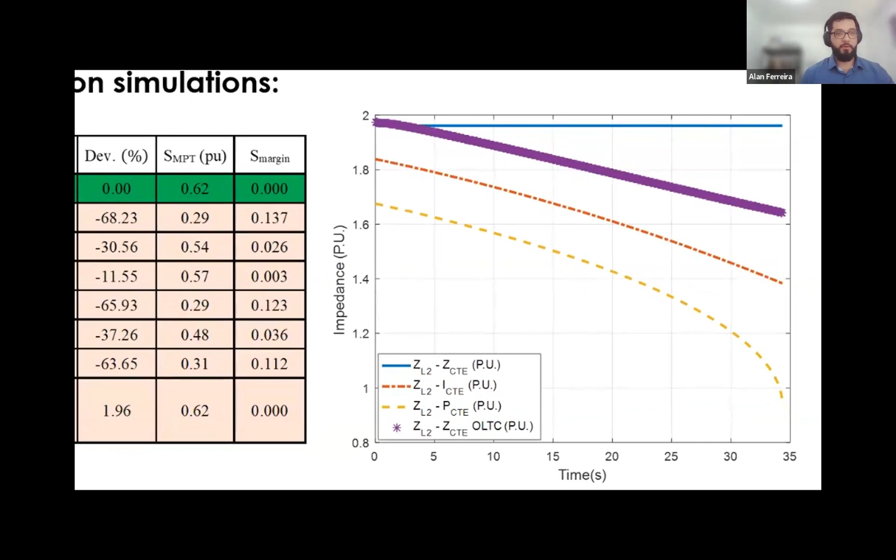So basically what we see here is that when the load is not linear, regardless if we are changing the demand or not, when the voltage changes in the system, the impedance of that load is going to change, and then it's not possible to keep the impedance of those cases constant if the load is not linear. So from this we have these preliminary analyses.

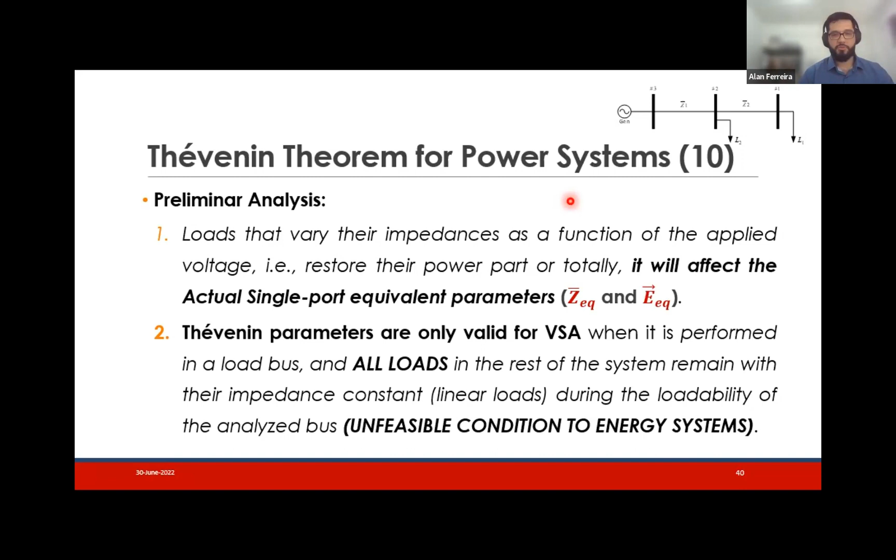So loads that can vary their impedances as a function of the applied voltage, that is, restore their power partially or totally, will affect the computation of the actual single-port equivalent parameters. And because of that, we see that Thevenin parameters are only valid for voltage stability assessment when it is performed in a load bus, and all loads in the rest of the system remain with their impedance constant during the loadability of that bus, which we can say is an unfeasible condition for real energy systems, right?

And thus, in general, Thevenin impedance cannot represent the actual equivalent impedance seen from a load bus, which means basically that in real power systems, ZTH, the impedance computed by Thevenin theorem, is different from the actual equivalent impedance. Consequently, because they are different, if we use the maximum power transfer theorem to estimate the power margin, it will no longer happen when those impedances match.

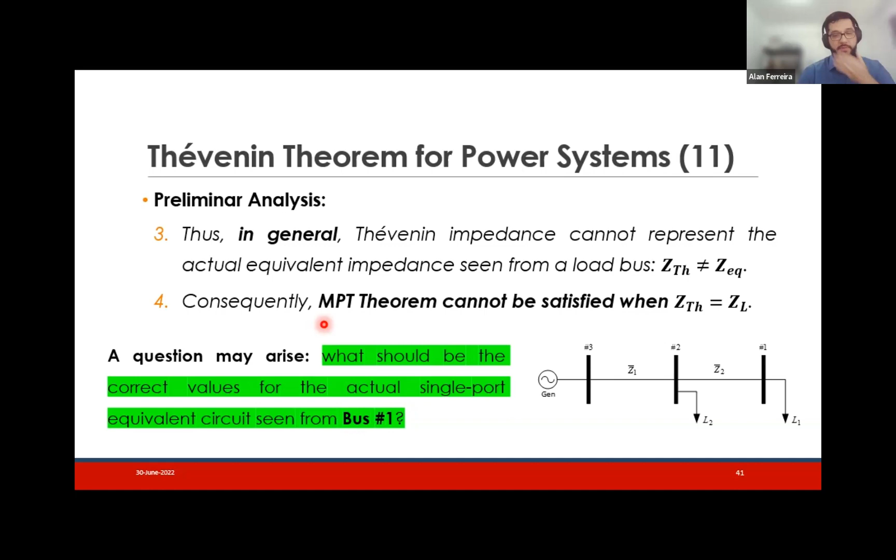But from these scenarios, a question may arise. If the Thevenin equivalent does not represent the actual equivalent of the system, what should be the correct values for the actual single-port equivalent circuit? So in order to obtain that information, we have to start from a circuit theorem that does not rely on circuit linearities, and for that task we can use Tellegen's theorem.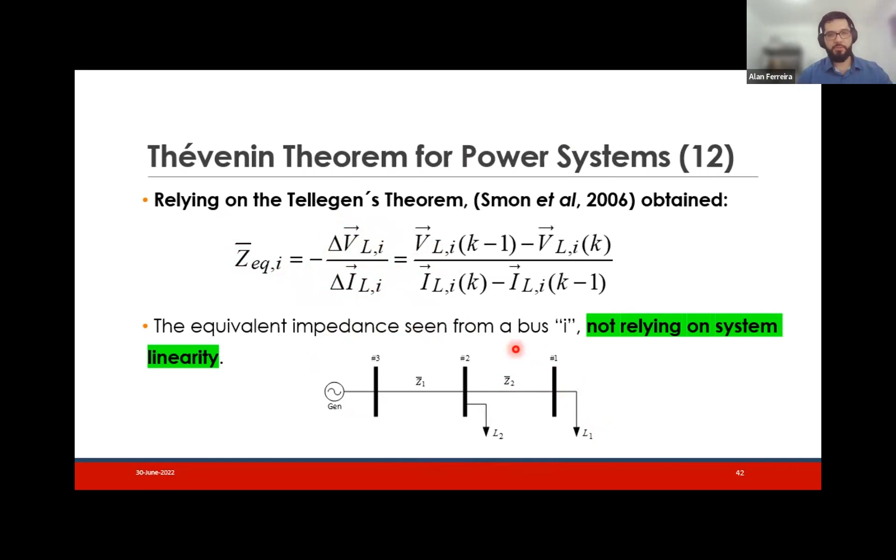From the developments of this paper here, the authors have derived this equation that says that the equivalent impedance seen from a given bus I can be computed from the variation of the load voltage in terms of the variation of the load current, right? And in order to check how this equation would be in terms of the system impedances, what I have done was to replace into that the system impedances. I have obtained this impedance here that I'm calling the analytical model, which basically should be the actual value of the equivalent impedance seen from bus number 1 here.

And an interesting fact from this equation is that here, just to clarify, K and K minus 1 are the two consecutive measurements that we are considering. And an interesting fact here is that if we consider ZL2 K and ZL2 K minus 1 being equal, that is, not varying, we're going to fall into the linear case.

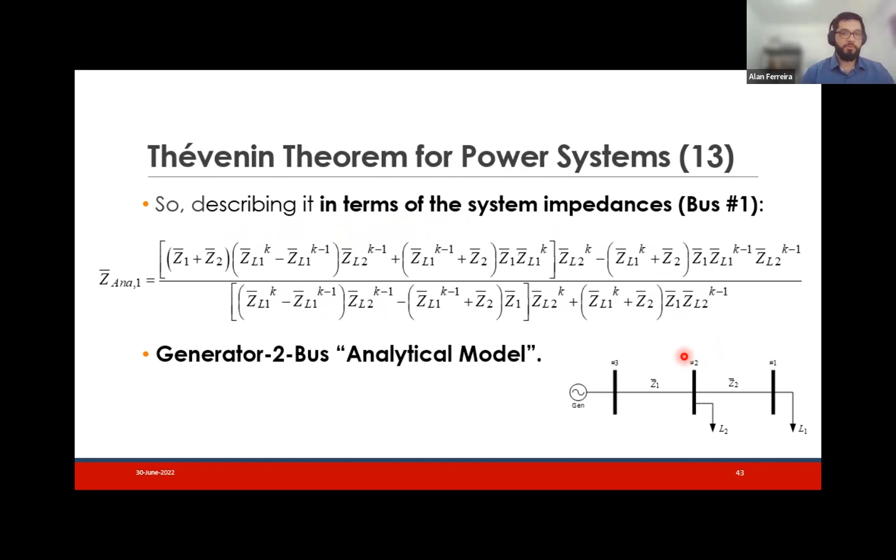Okay, the equivalent impedance, the system impedance cannot vary, and this is the same equivalent impedance obtained from Thevenin theorem. Okay, so what we can see is that the linear model, the Thevenin theorem, is a special case of this general case for non-linear loads, right?

And just to finalize regarding the simulations here, in order to show that Thevenin-based methods can correctly estimate maximum power transfer for cases Thevenin theorem was not able to do, we can see here a case that we have chosen where both loads are nonlinear and both loads are increasing their demands.

Okay, and what we see here is that I have considered two methods: the adaptive method, which is the original adaptive method I have mentioned earlier, and the CPM equivalent, which is a method based on extended Ward equivalent.

Okay, and what we see here is that both methods correctly estimate the maximum power transfer, as well as the analytical model, because both approaches follow the analytical impedance, differently from the Thevenin impedance in the bottom part here in the dashed curve. And it was possible to check that computing the reactive power response as well.

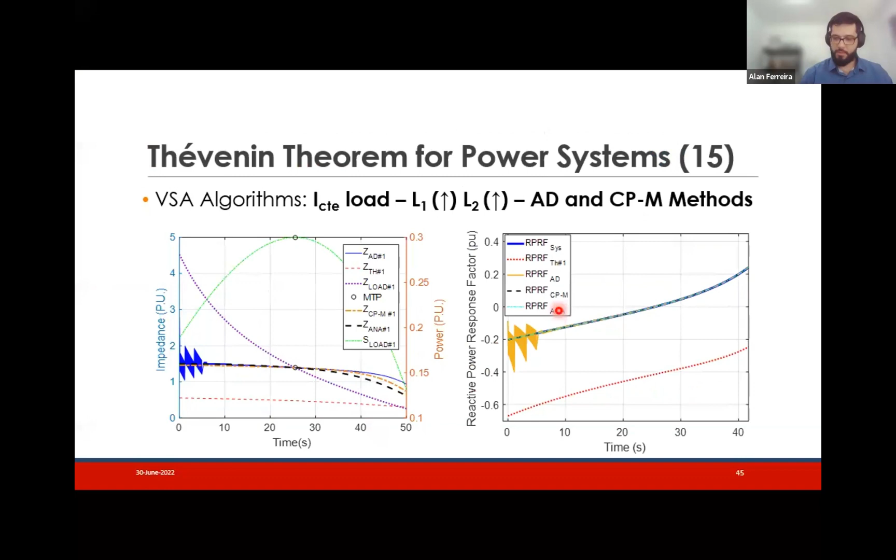Okay. So, going to the conclusions of my work regarding the developed methods, we see that the developed approaches have shown improvements regarding the original approach, because now they are able to accurately estimate the single port equivalent circuit, regardless of inductive or capacitive PMU measurements, which means that it's able to properly update regardless of the quadrant the PMU measurement is, okay?

Another improvement of the developed approaches was that both approaches were able to estimate both sides regarding a boundary bus using the same disturbance data, which is also an improvement regarding the famous recursive least squares method. Unfortunately, because of a matter of time, it was not possible to show this, but we can clarify that in the arguing part.

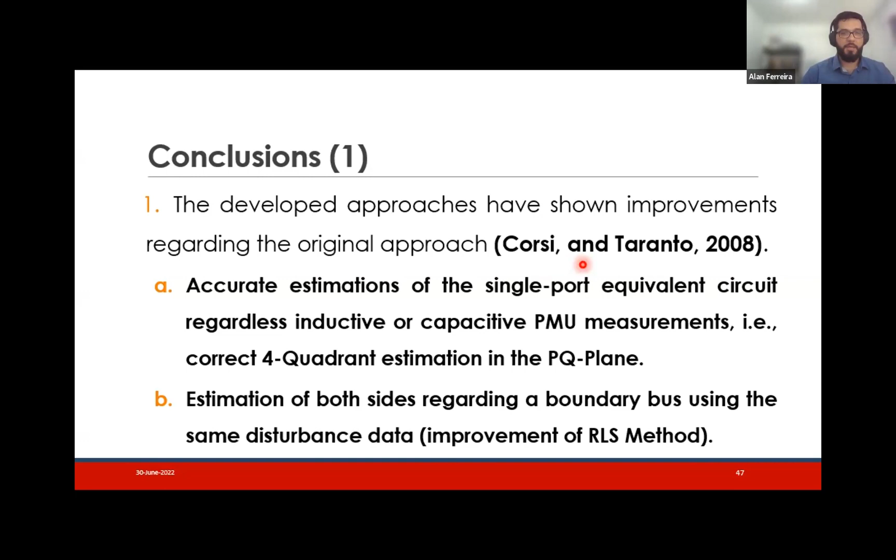The second conclusion, consequently, because our approach accurately computes the equivalent parameters, when we use indexes based on that, both indexes used were able to accurately estimate the voltage stability limit, right?

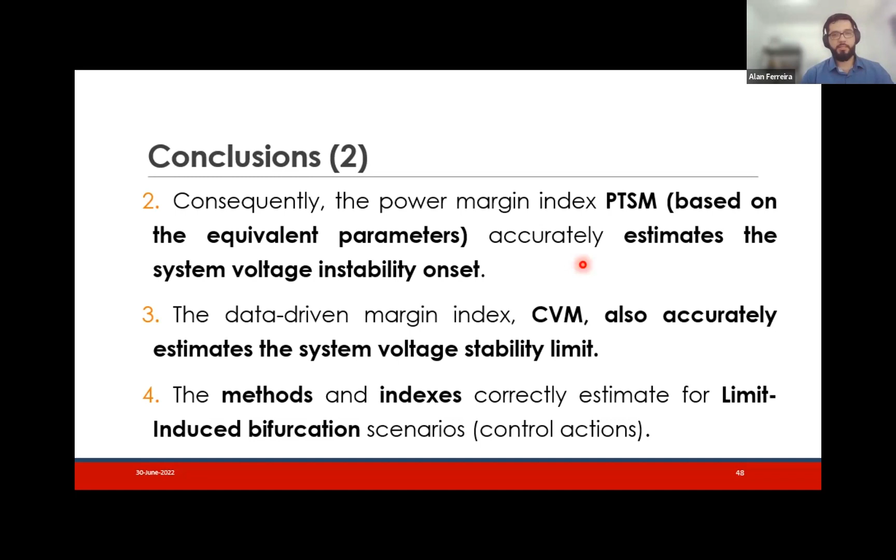And a comment here, because we have seen that our methods were tested for cases where over-excitation limiters have acted, we can say as well that our methods are able to correctly estimate for limit-induced bifurcation scenarios, the cases where the control actions play an important role in an anticipation of the voltage instability point.

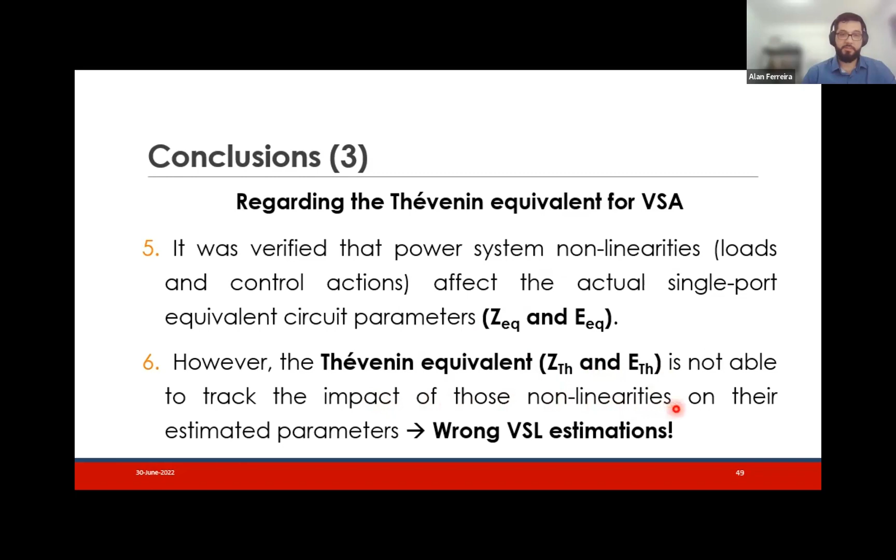Regarding the Thevenin equivalent for voltage stability assessment, it was verified that the power system nonlinearities affect the actual single port equivalent circuit parameters, Zeq and Eeq, but the Thevenin theorem parameters, ZTH and ETH, are not able to track the impact of those nonlinearities on their estimated values, which will cause wrong estimations of the voltage stability limit of the system. So, because of that, Thevenin equivalent is not recommended for voltage stability assessment purposes.

The explanation why the methods inspired on the Thevenin equivalent have worked to assess voltage stability is that those methods are able to estimate the actual single port equivalent circuit and not the Thevenin parameters, because they were able to extract from PMU measurements the system nonlinearities and assure very accurate reactive and real power responses.

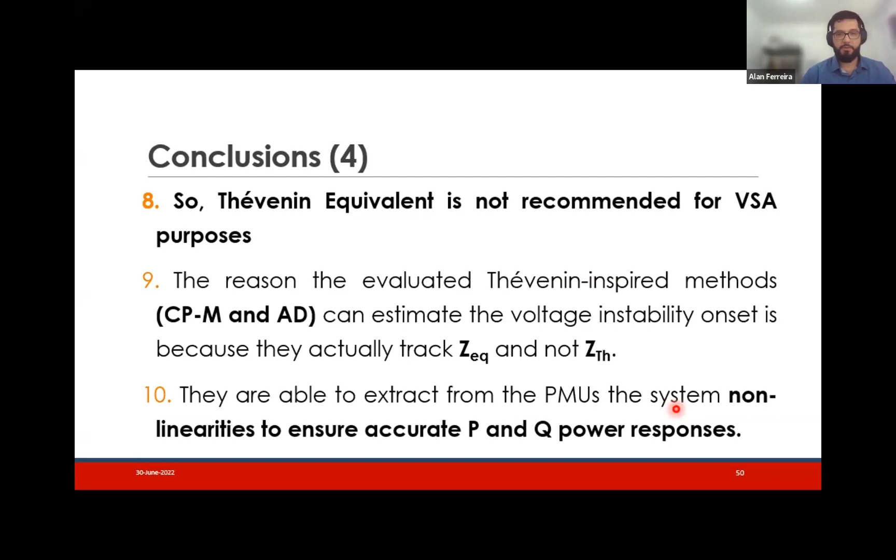In this way, we can say that for voltage instability identification purposes, what matters is whether the actual impedance is approaching the load impedance and not whether ZL is getting closer to ZTH. Consequently, the maximum power transfer theorem concerns the impedance matching between ZL and Z equivalent, taking into account all the nonlinearities, and not regarding ZL and ZTH.

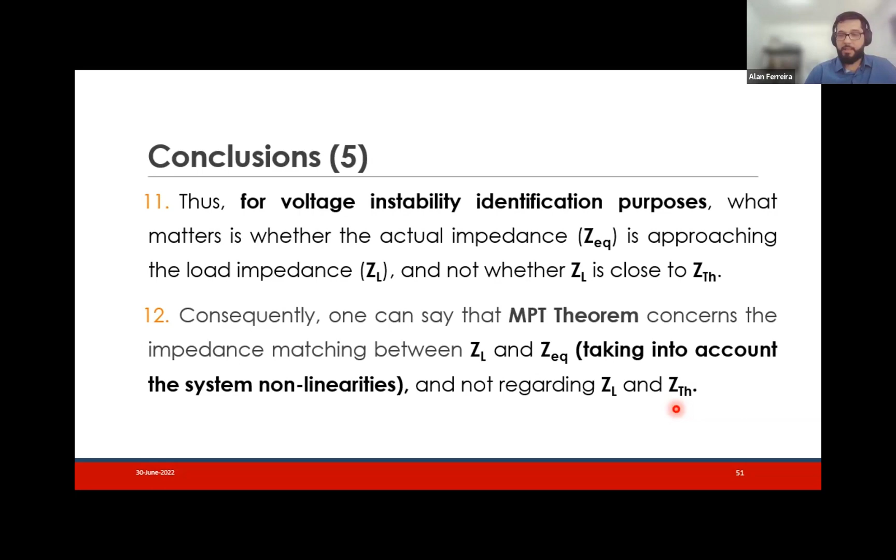Okay, and finally, we can see that the analytical model was important to explicitly show what should be the correct expression of the equivalent impedance, which was different from the expression from Thevenin theorem.

Regarding some ideas for future works, one is to check the performance of the developed approaches on distribution networks and in power systems with DC transmission lines and their converters, in order to check if our approaches are able to extract the impact of those converters; test the new algorithm in systems with high share of inverter-based resources. And finally, one idea is to expand the analytical model to any bus of the system.